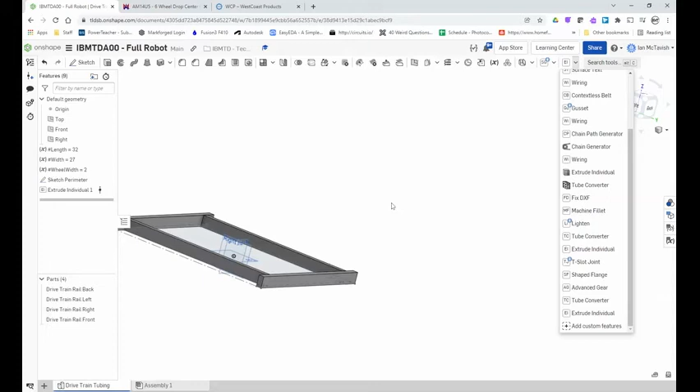And this is part 3, where are my wheels? So we are in Onshape. We've started in part 1, we created a sketch. In part 2, we extruded our rails. So that's where we're at.

And what I'm going to do is I'm going to use the view cube, and I'm going to look to the right. And I'm going to use this as the way that I can position my wheels. So, a couple things with the wheels. First off, I need to make some decisions. Decision number 1, what pulley am I going to use?

Now, andymark.com, AM14U5 and AM14U6, this is the kit of parts chassis. We've built this a couple of times, so the key thing is we have all of these parts. And you can see there's a 42 tooth pulley in that. So to make things simple, we're just going to use those pulleys, and that's 42 teeth.

You can see there's some belts as well, and this is where we need to make some decisions. So the first thing that I want to point out is these belts are HTD. This is a standard, and standards are really important to understand. So we're going to switch over to West Coast Products.

wcproducts.com. This website has some calculators in here, and that's really useful. So I'm going to scroll down, and I am going to look at their resources page. So on their resources page, there's a belt calculator. So with this belt calculator, I can make some decisions.

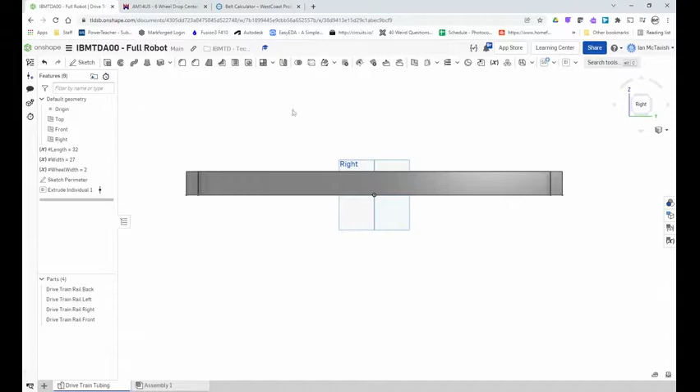Now on our sketch, I've changed my view so that I'm looking at the right-hand side, and I'm going to create a new sketch. I'm going to rename this. I'm going to call it sketch wheel locations. And I'm going to select the right-hand plane to do my sketch on. There we go. So I'm going to start with the circle. The circle tool, the letter C is my keyboard shortcut. Remember, if you have trouble finding a tool, use the search tools to find it.

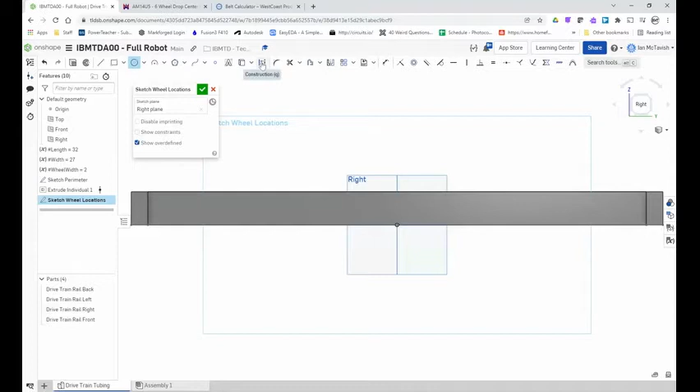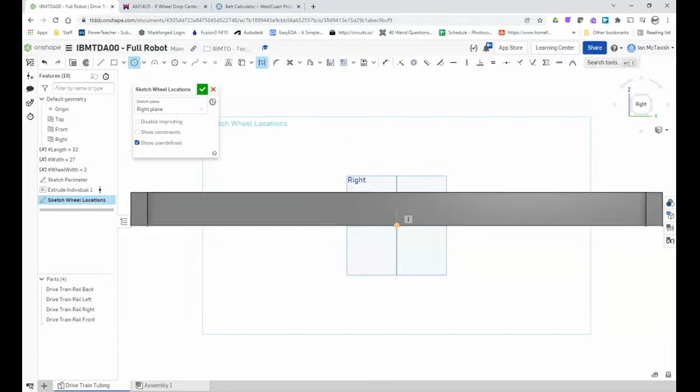So the circle tool, I'm going to create a construction circle. I'm going to take my mouse and I'm holding it over the center origin. And I'm going to move it up. And you see that dotted line and the little icon. That icon indicates that this point is going to be vertically constrained. It's going to stay vertical to the origin. So that's great. I'm going to click once. I'm going to move my mouse. I'm going to click a second time, and I'm going to take my hands off.

So the dimension for a circle is the diameter. On my keyboard, notice I'm not touching my mouse at all. I'm just going to type the number 6 on my keyboard and hit enter. So here is a wheel, and it is a 6-inch wheel. Now the reason that it is a construction line is I don't want to actually make this into an object. Later on I'm going to import a wheel, and that'll be great. But I do want to make sure that the geometry works.

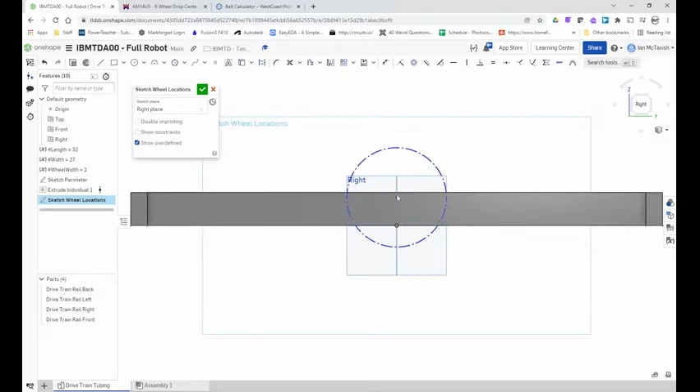So I've got my wheel. I'm going to turn off my tools by clicking them on the toolbar. There's my wheel. Now, I can move that center, and I can move it up and down, but you'll notice I can't move it sideways. That's the vertical constraint.

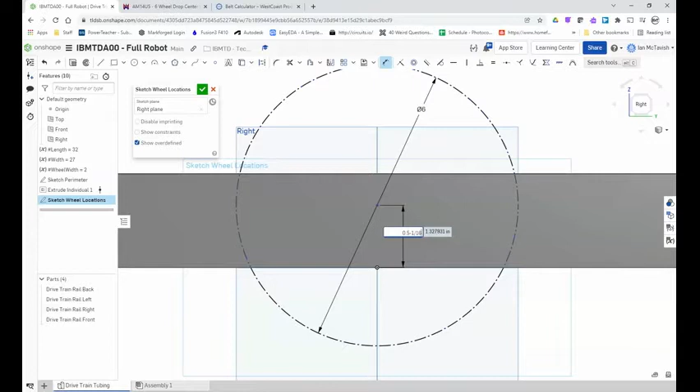So what I want to do is I want to set my dimension tool. Remember, the letter D is the shortcut for the dimension tool. I'm going to zoom in and I'm going to click the center of the circle. Then I'm going to click the origin. Then I'm going to move my mouse to the side and click. Now, what I want is I am going to take 0.5, which is half an inch, minus 1 divided by 16. So 0.5 minus 1/16.

So what this is, if I hit enter, whoops, I just made a mistake. Double click, I'm going to fix that. Instead of 0.5, sorry, it is 1 minus 1 divided by 16. So what this is, this is a 2-inch square tubing. So the middle of that is going to be 1 inch. And what I'm doing is I'm actually moving the center down 1/16 of an inch.

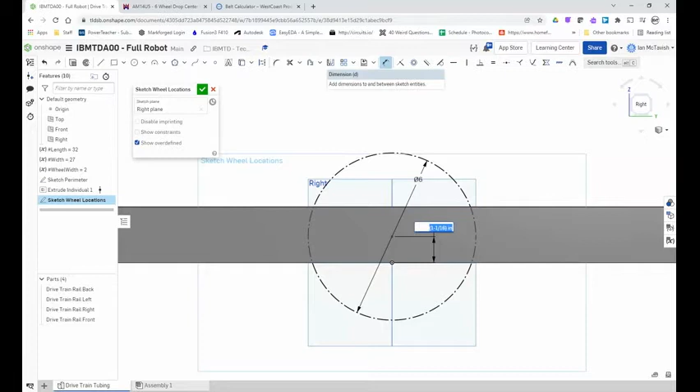And the reason I'm doing that is I want my center wheel to be lower than my other wheels. And what's going to happen is that when I'm driving, I've got 3 wheels on my robot frame. Well, that's a lot of friction because when I'm turning, it's like a tank. To turn, the wheels on the one side go one direction, the wheels on the other side go the other direction. So the front and back wheels will tend to scrub.

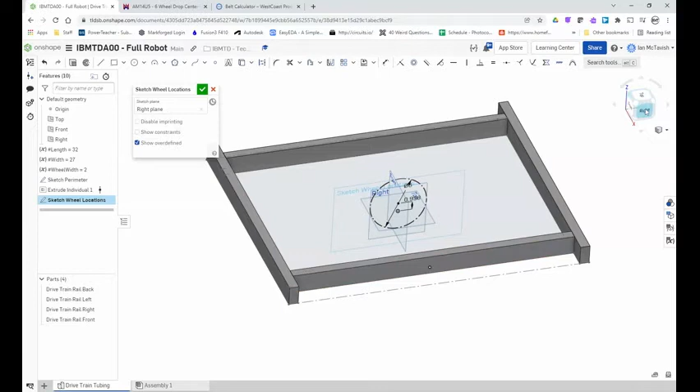And what I'm doing is by dropping the center wheel so it's just a little bit lower than the others, they won't scrub quite as much. So I drop it 1/16 and I raise the other wheels 1/16, which means that there's a 1/8 inch difference. Doesn't seem like much, but it'll help my robot turn. So there's my center point, there's my center wheel.

Now, what I'm going to do is I'm going to add another circle, and I'm just going to click now. You'll notice I'm moving it over here. This is silly, and I'm just going to hit escape. I'm not going to set the measurement. The reason I'm doing this is that it'll help me set my measurements. So that's a really key thing.

Now, what I want to do is I want this circle to be the same size. So over here, we have our constraints. And one of them is the equal sign, which is the letter E. So if I hit the letter E on my keyboard, that will turn on my equal constraint. And I can now press this circle, click, and I can click the other circle, click. And what I've done now is that I have constrained these 2 circles so that they are the same diameter.

I'm going to just undo, and I'm going to demonstrate again. So circle tool, construction tool. Remember, C for circle, Q for construction. I'm going to click and escape. That makes a circle. I'm going to now type the letter E, and I'm going to click this circle and that circle to make them equal in size. And it's a lot more obvious when I have a smaller circle. You see it expands to be 6 inches.

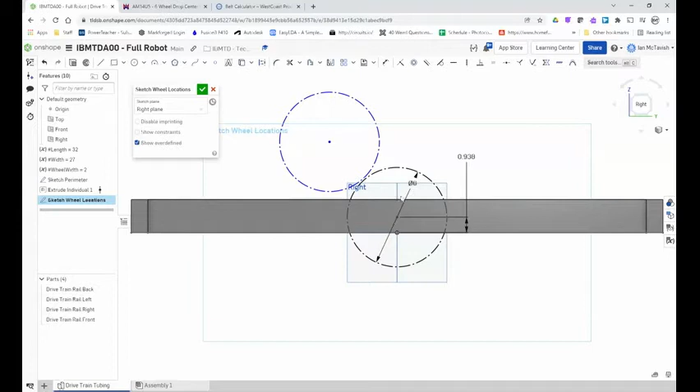Now, this circle I need to set. So I want to make it 1/8 inch higher than this. So what I'm going to do is I'm going to use my dimension tool. Actually, no, I'm not. Just give me 1 second. Dimension tool, what I'm going to do is I'm going to click the center of this circle and the center of this circle. And you'll notice that I can move this way, and that will give me the center to center distance. If I move my mouse this way, that gives me the vertical distance. And if I move my mouse this way, it gives me the horizontal.

So the reason that I did this is that it's easier for me to move my mouse to get the center to center distance. So I'm just going to click over here and I'm going to type the number sign. Now, the number sign allows me to select a variable, or it allows me to create a new variable. So I'm going to create a new variable, enter, and I'm going to select a number. Oops, go back to length. So the number 6, that's great. I'm just going to use that.

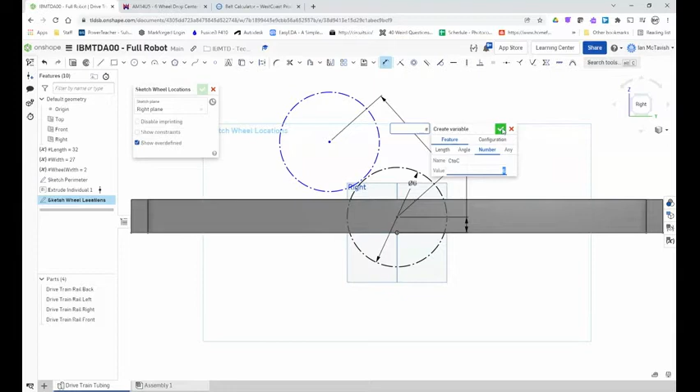So select number, CtoC. So the letter C, to, C, notice no spaces, and I'm just going to type the number 6. I'm going to change that value later, but what I've done is this is going to be my center to center distance for my belt, green check mark and enter. So you'll notice over in the features, there is now a center to center variable. So 6 is my center to center distance.

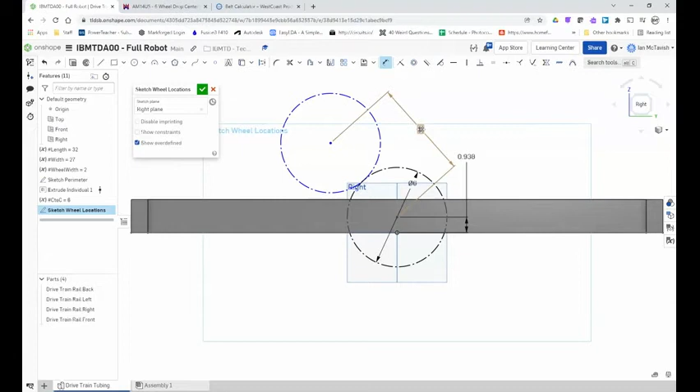And this is really useful. I can create variables as I go. So if I forget to do them in advance, I can create them. So here's my center to center distance. I'm going to use my dimension and I'm going to now click the two centers again. And I'm going to move my mouse this way so that it is going to be the vertical distance, 1/8. I want that to be 1/8.

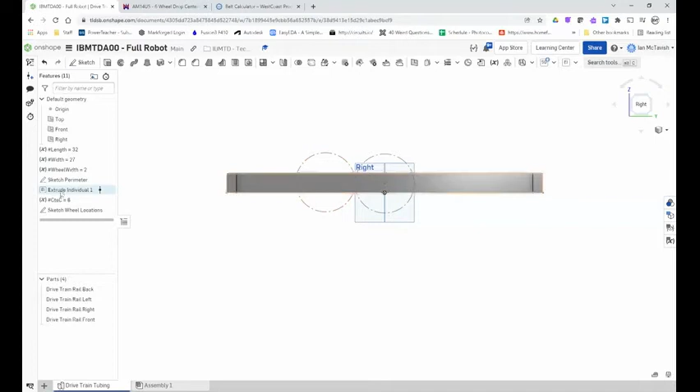Now, here is the key. I'm just going to click the green check mark. Right now, this wheel is obviously going to be ridiculously close. I can change my center to center distance. So let's try 10. And you can see as I move that, I can get it closer to the front.

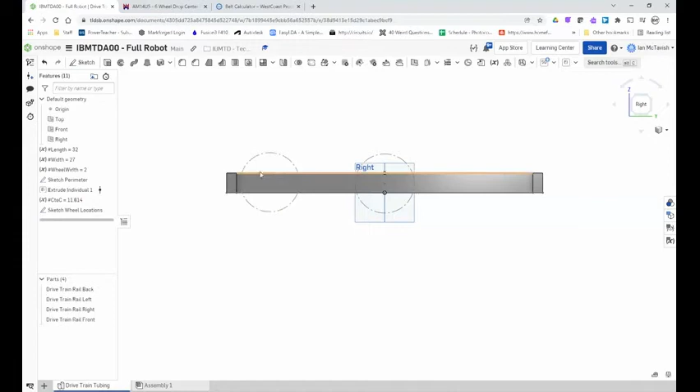So with my belt calculator, you can see the 160 tooth belt is 11.614. All right, so I can change this and I can just copy and paste 11.614. There we go. So that gives me my center to center distance. That's really useful. Now, I'm going to add another variable.

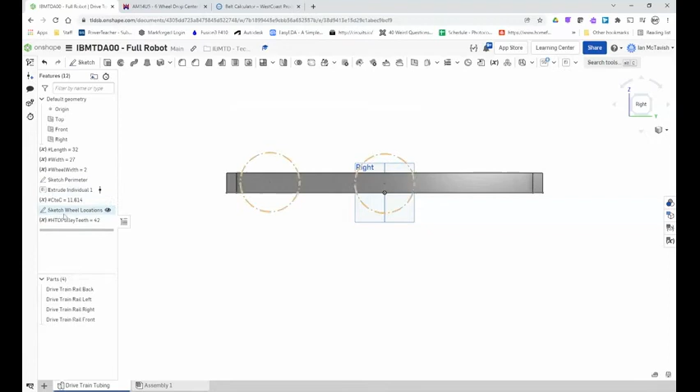HTD pulley teeth number 42. The reason I'm doing this, I'm not actually going to use this at all, but I'm just adding that variable and I can actually drag it up here. But later on, when I'm going, oh, what size pulley was that? I don't have to second guess. It's actually in my sketch now. So it's easy for me to remember that. So that's the key thing.

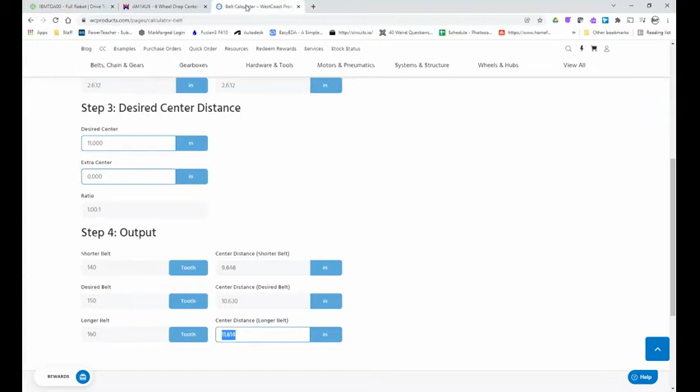I'm going to do the same thing for the belt. And so it's a 160 teeth belt. So I'm just going to add a variable, change it to number, belt teeth, and 160. And that way I have these variables. I'm going to drag them up there so I can refer to them later on.

So if I decide, yeah, I'm going to build this and I'm going to start buying parts or go into my storage area and picking parts, I can refer to the sketch and I can go, okay, I need a 42 teeth pulley. I need a belt that's 160 teeth and it's got to be HTD. Perfect.

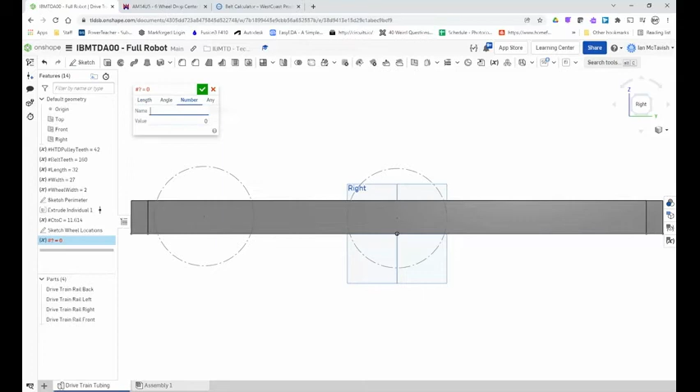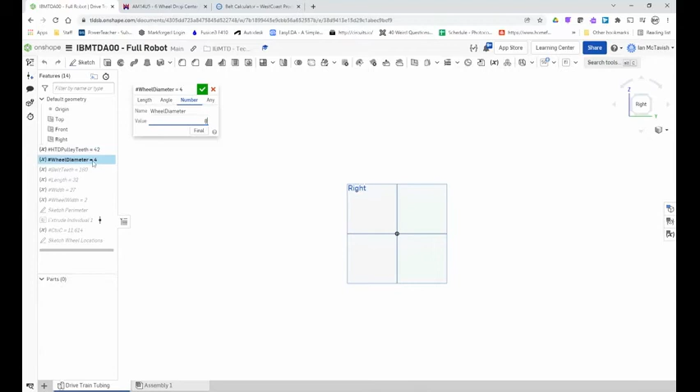So that's the other thing. I can do the same thing. I can add a variable for wheel diameter. And remember, we were dealing with 6-inch wheels. So obviously, sketching wheel locations, there's the 6. I need to change that to wheel diameter. But now, everything I can change. So I can change that to a 4-inch wheel. And just like that, it's now a 4-inch wheel. So that's really useful.

Okay, so I have my front wheel, my middle wheel. I'm going to go back into wheel locations and I'm going to use the mirror tool. Actually, no, I'm not going to do that yet. We're going to add more circles. So the circle tool, again, what I'm going to do is I'm going to click and click. So this is going to be my bearing hole. So my bearing is 1.125. Those are my bearing holes.

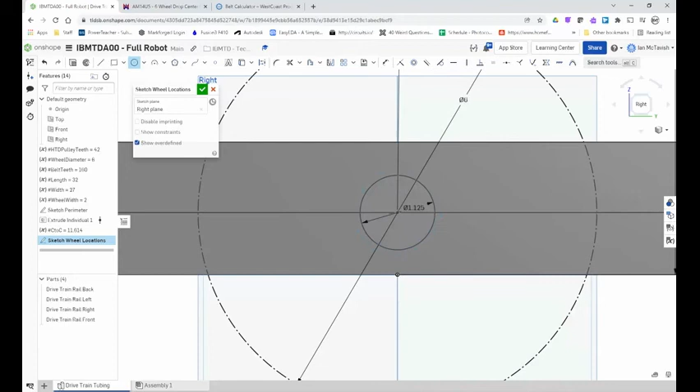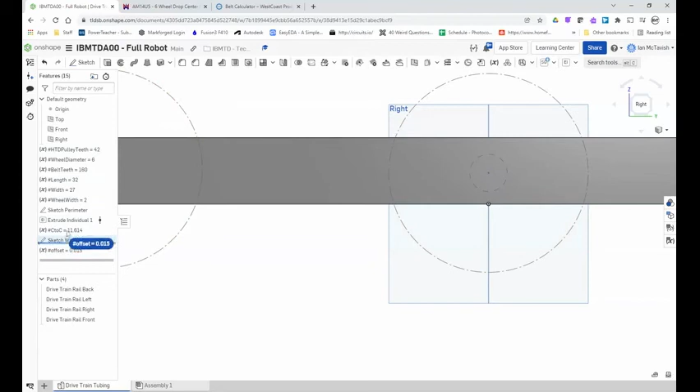Now, often I need to add a distance. Usually when I'm typing in a hole, what I'll do, and I'm just going to demonstrate that very quickly, is I will have an offset. And typically 0.015 is my offset. So when I have an offset, and if I drag it up here, sketch wheel locations, go back in, what I'll often do is I'll go in here and instead of 1.125, I'll type 1.125 plus number sign offset.

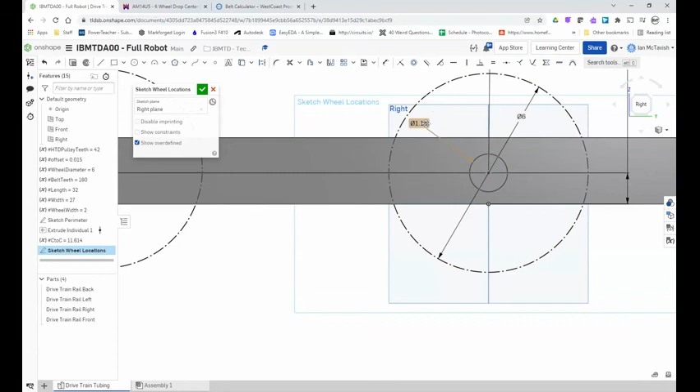And the reason for that is that now I can have a hole and I've got my offset set so that all my holes are just slightly bigger and I can adjust that. So that's really, really useful.

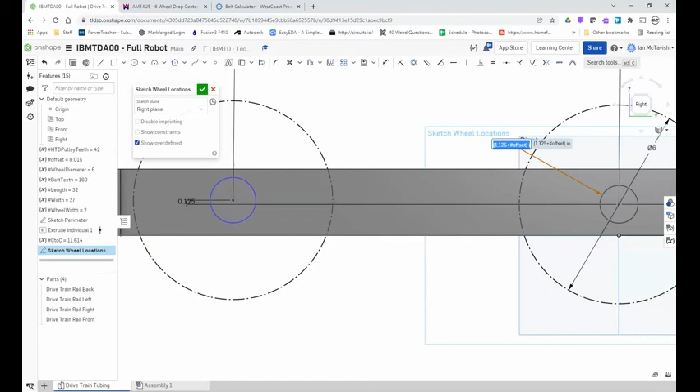And I'm going to just add another circle right here. Click, click. And again, I'm not going to do that. I'm going to type equals. So the letter E, and I'm going to click those two circles. And I should now have 1.125 plus my offset, which is 0.015. And this is the same size as well. It should be. Oops. Let's just make sure, equals. There we go.

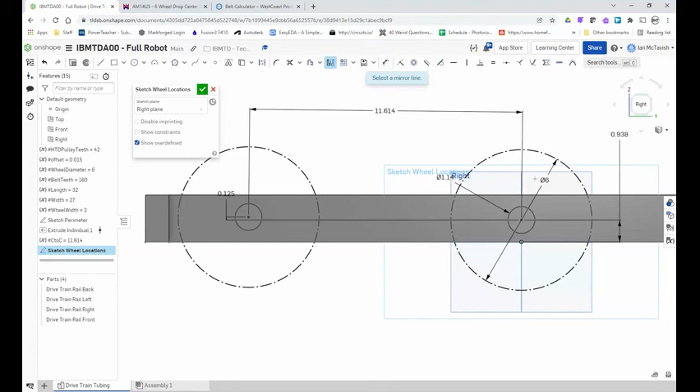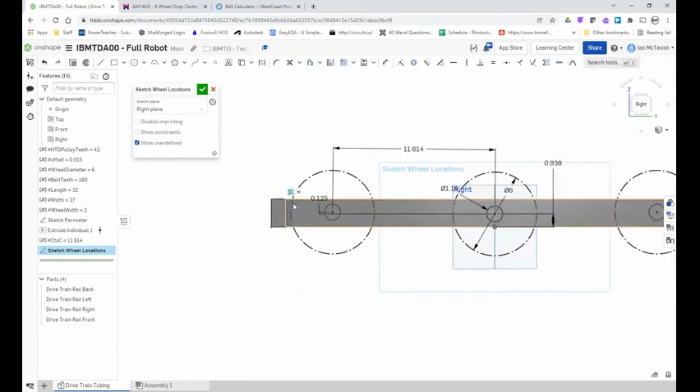Now that I've got that hole done, now I can use my mirror tool. And I'm going to mirror that. I'm going to select that circle and that circle and that circle. And if I zoom out, there we go. I now have my three wheels. I can see how far away they are from the front. That seems to be a good distance. If I had the wheels really close together, then it wouldn't be as stable. This is nice and long and stable. We're good. So green check mark. My wheel locations are set.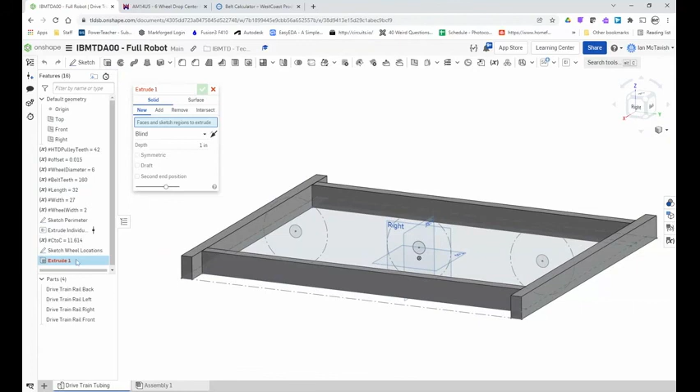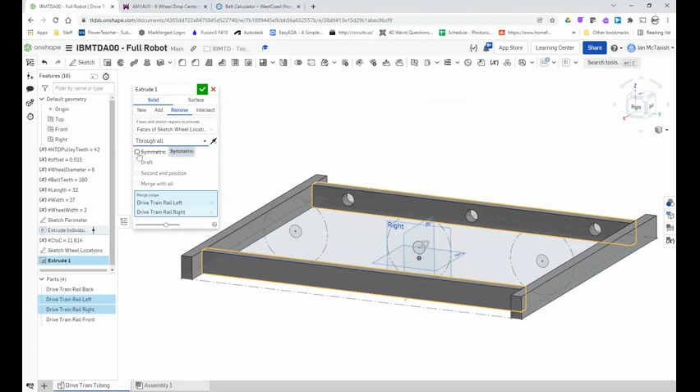And you'll notice that the sketch is right in the middle. So what I'm going to do is I'm going to extrude my wheel locations. And you'll notice I get this little thing. I want to select remove. And I get red because it's not touching anything. Merge scope, I want the left and right. We're going to merge with that. Now, through all, and you'll notice it's going through that side because it's going in that direction. That's where the symmetric comes in. I can select it so it's symmetrical, and now I've got holes through both.

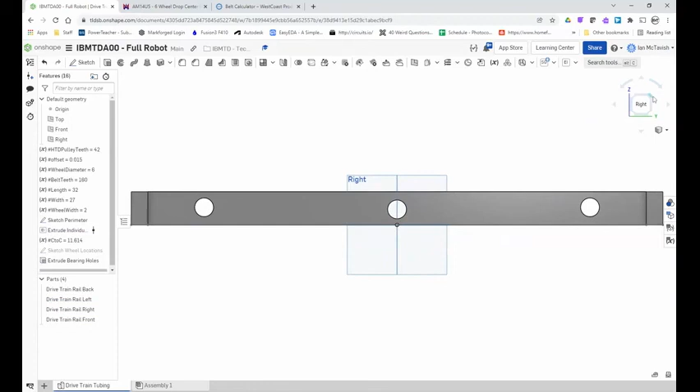So extrude, this is my bearing holes. Green check mark, and just like that, I now have my bearing holes, and that's where my wheels are going to go. And you can see the center wheel is a drop center. It's 0.015 of an inch lower than the other two wheels, which will reduce the friction when I'm driving my robot. Stay tuned for our next tutorial.